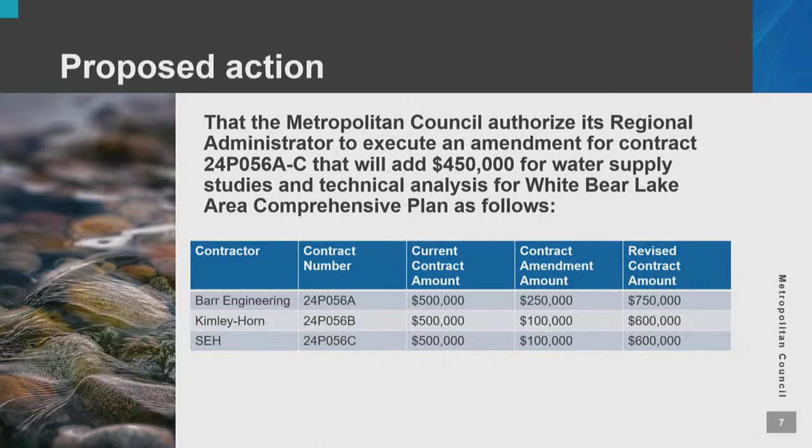Councilmember Jenkins asked, as a new person familiar with Project 1007, how does this connect with that? Chair Wolf, Project 1007 is a study being done by the Health Department, one of about 18 studies we're now looking at, and it feeds into the overall work of this group. We're looking at Project 1007 as a way to see if there's a water source we can reuse the treated water from the PFAS settlement.

Councilmember Lindstrom asked: are these going to be funding studies 19, 20, and 21, or more supplementing the first 18? These will be funding some new studies, but they're also needed to finish up phase 2, part 2 of some of the current studies. We have not bid out or sent out work orders for all the current studies, so this will help us fulfill the rest of those orders.

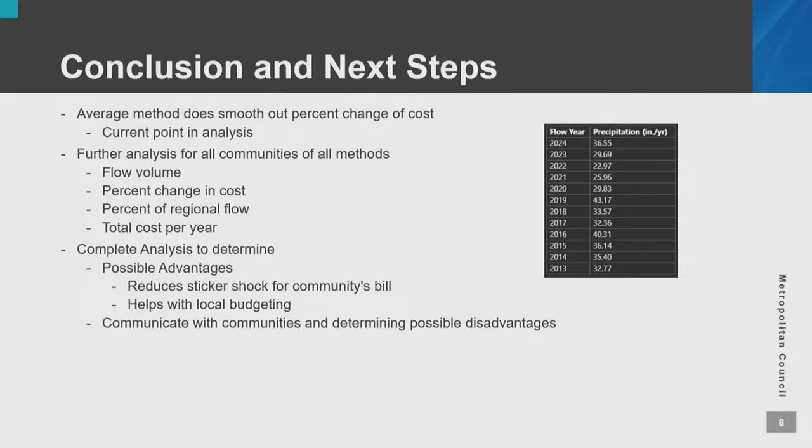So, conclusions and next steps: the average method does smooth out the percent change of cost and is a current point in analysis. Further analysis is needed for all communities and all methods - flow volume, percent change in cost, and total cost per year. This is needed so we can see possible advantages for each community, which could relate to reducing sticker shock for the community's bill, helping with local budget planning, and communicating with communities on determining possible disadvantages. Are there any questions?

Question: what sort of outreach was done with local communities to get their feedback on these two methods? Response: No local outreach has been completed as of this moment. We were just playing around with numbers to see how they would all look. In future steps, we're looking at maybe creating a task force and proceeding from there.

Okay, because the only reason I raised that is because this has been a question that obviously has come up recently, so I'm looking forward to seeing further steps. Thank you. Thank you.

Yep, and one of the other things that has come up with regards to this is what happens in a rapidly growing community. If you average it out, then they aren't actually paying their full freight because of the growth. Whereas, Champlin, where it's flat, they don't really have a change from year to year. But if you have a very rapidly growing community or you add a big user, you'd kind of get a little free sewer in your bill, a little while.

Councilmember Lindstrom: some places you have some unmetered flow too. And that's been some questions, especially when it's shared between two entities, one city and another, or one small town and another.

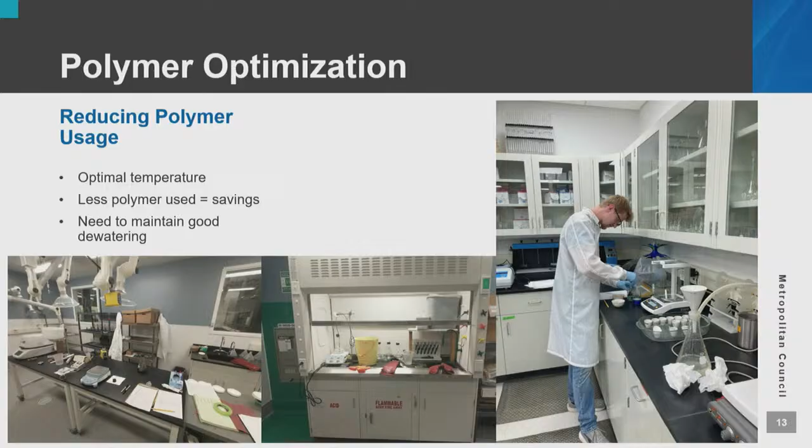So how do we reduce the polymer usage? This is a massive chemical cost for the Metro plant, and we want to reduce it as much as possible. Currently, with incineration, there is excess heat available that could be used. So we were looking at finding an optimal temperature where we can reduce our polymer usage, but still maintain good dewaterability in that sludge. This is a lot of information, so I'm gonna break it down slowly, one at a time.

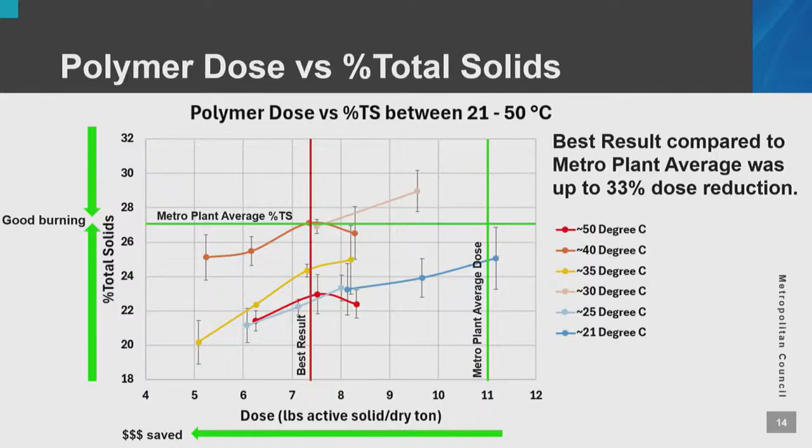That looks like great news. However, these trials were done across different days. We did a control alongside each and every single trial, and the controls varied a lot day to day. At the end of the day, what is coming into the plant we can't entirely control, so there's a lot of variation in the contents of the sludge. This brought up questions on how precise our laboratory method was in actually imitating the real process going on in the solids Metro building.

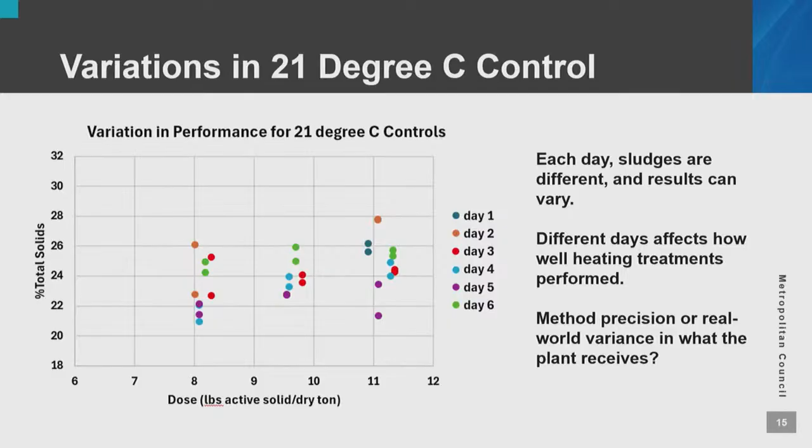The second thing I helped work on was an opportunity at the Seneca plant. There was cyanide inhibition happening on the nitrifiers, so nitrite was not converting to nitrate. We created batch tests, small jars of wastewater where we would try to recreate the issue and imitate the full-scale plant on a lab scale. To do that, we had to sample the wastewater to get it into those jars, and sample what was causing this inhibition. We found out it was cyanide, so we started treatment exploration for how to treat this stream of cyanide being generated within the plant.

This was my favorite part of the internship. It really allowed me to work closely with a team of engineers and collaborate with other sections of environmental services, including the lab at Metro, operations at Seneca, and even a little bit with industrial waste at the Metro plant. It was eye-opening to get that greater experience and see what the council does as a whole to help solve problems.

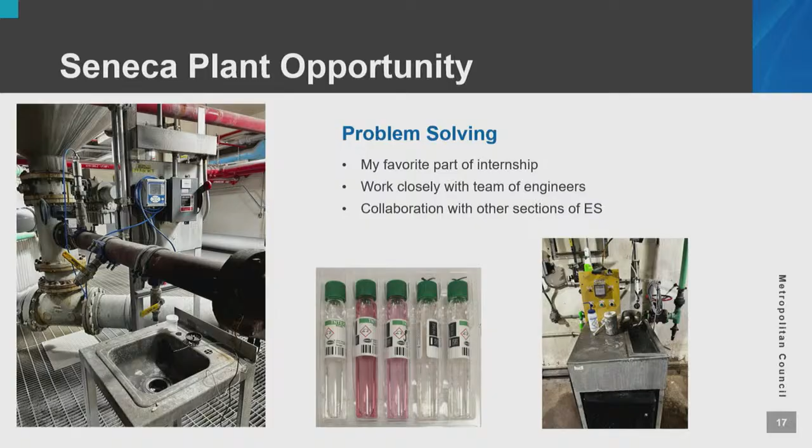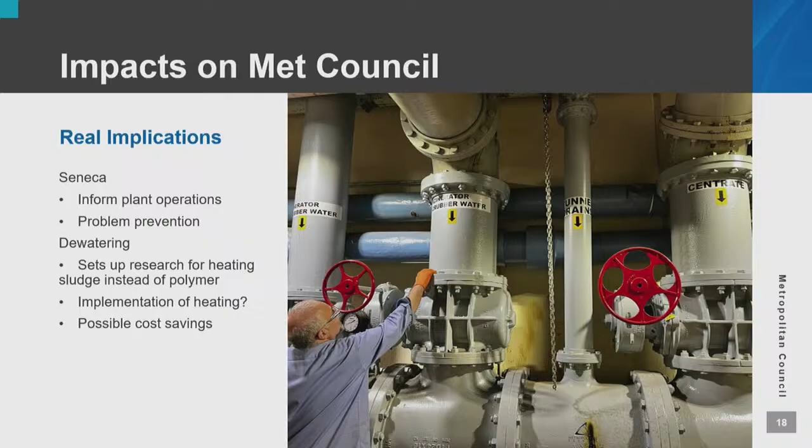Both of these have real implications on Met Council. With Seneca, I helped inform plant operations and assist future problem prevention. With dewatering, it sets up further research for possibly heating the sludge instead of the polymer. Is there an optimal temperature where we can use excess heat from incineration to see if sludge temperature makes a difference on the binding? Or even ask, how could we implement infrastructure for heating if we do get a 33% dose reduction, since that's a lot of dose reduction across that $3.4 million budget. That possible cost savings is the goal, to see if with further research we can set up infrastructure in the plant to reduce our polymer usage.

The impacts on me, I really enjoyed my time here. It allowed me to have teamwork and collaboration with a team of engineers and do some problem solving that was very applicable to real life. For me, it confirmed my interest in wastewater and continuing to serve communities no matter where I end up.

Are there any questions? Thank you.

Councilmember Carter: I was just wondering, what's the primary cause of the cyanide in the water? Because that's a pre-existing problem, right? Thank you, Ms. Chair and committee members, for the question. The primary cause of cyanide in the water here was incomplete combustion in a multiple hearth incinerator that would not get rid of all the organic compounds, and then it would generate cyanide. The cyanide would then be captured in our air pollution control train, and that is discharged back into the plant as a recycle stream. Does that answer your question? Yeah.

So how do you fix that? Thank you, Ms. Chair and committee members, for your question. That is something we are currently trying to figure out because we didn't have a long-term solution in place. We were able to help operations get back to normal of sorts, but we are still looking at long-term solutions for that treatment. Thank you.

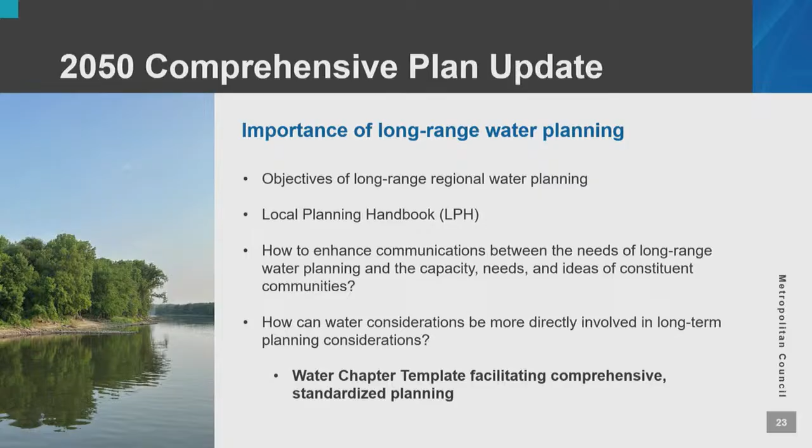A big question I came to ask, along with a team here in environmental services, was how we can enhance communications between the needs of these communities and the long-range water planning and capacity needs, and how water considerations can be more directly involved in long-term planning. We came to developing some materials, and I came to support the development of these, such as the water chapter template and the how-to guide for water supply planning.

One of my early experiences was being involved in the MAWSAC meeting, the Metropolitan Area Water Supply Advisory Committee. Hearing feedback from community planners across the metropolitan area was instrumental in developing perspectives on what planners are thinking about 25 years in the future, considering not only their water plans but all the other aspects water involves. Feedback included wanting sufficient resources, cross-collaboration, contingency planning, access to other communities' plans, and prioritizing requirements that might conflict with different watershed and state requirements.

By assisting with development of the how-to guide, I included examples from different communities from the 2040 Comprehensive Plan. We were able to provide example materials that communities will use for this next round of development, to establish commonalities between communities and recognize differences in approach, since every community in the metropolitan area has distinctive approaches and planning needs. I included a requirement and two example communities that might be relevant for future planning.

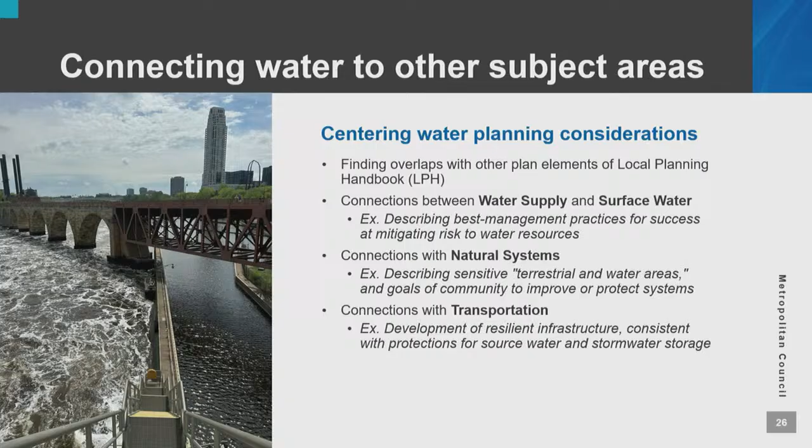Another part I helped develop was the water chapter template. Water is so important in so many ways, and for a community to develop their water supply plans, we wanted to make sure water was being considered front and center along with many other important considerations at play. By developing connections with different plan elements, such as natural systems and transportation, I included some examples here to better highlight water as an important consideration in the water chapter template.

Other similarities include parks and trails, the protection of surface waters, and housing. Housing is similarly universal and important as water, making sure these considerations are equitable, sustainable, and important for the long-term planning of member communities in the region. This includes development of housing needs concurrent with expected water demand, and analysis of affordable housing factored in alongside access to water resources.

In developing these plans, we didn't just want empirical numbers, but wanted a narrative explanation so that communities developing their comprehensive plan can follow along with how other communities with similar water planning needs or requirements were able to complete their own plans.

The outcomes for these long-range plans will synthesize all the resources and considerations communities are thinking of, to build a resilient, prosperous, and prepared regional community. By 2050, communities within the metropolitan area can look back and understand that these plans they developed were purposeful and impactful.

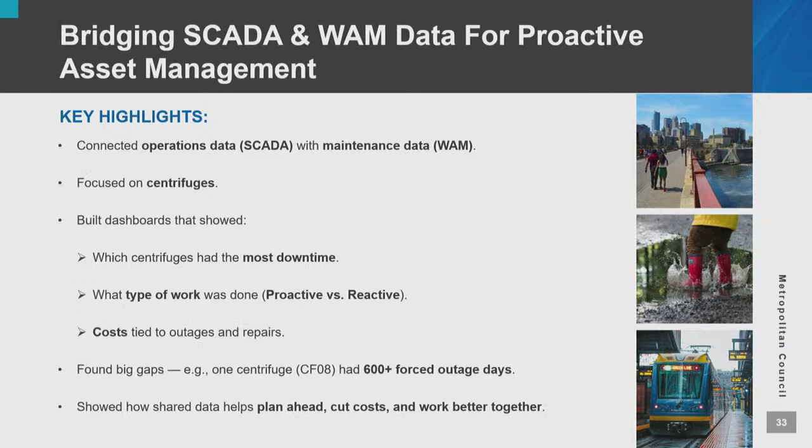And this kind of information seems super simple, but it's extremely helpful in helping us quickly identify where the major reliability issues may be hiding and which exact equipment might need closer attention from us.

What's the definition of forced? So there are two sorts of outages. It's either you schedule an outage, so you take this centrifuge down and see if any work is upcoming, or a forced outage, which is when it stops because there's a problem that has to be forced.

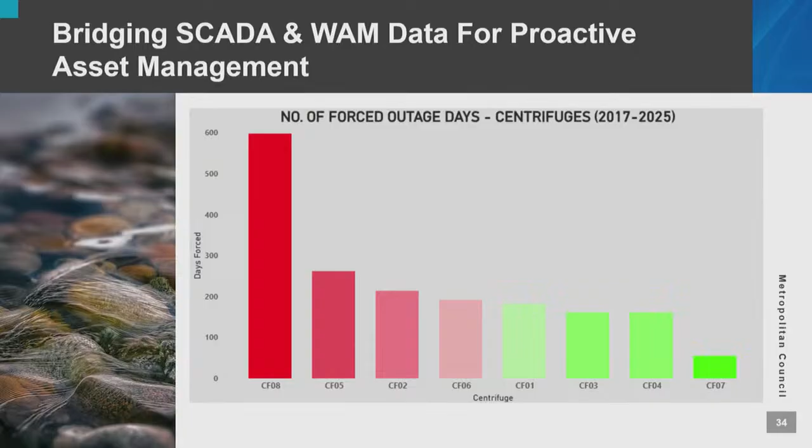And so from there, I basically created two drill-through pages, which in simple terms are detail pages. For example, if a person is on the main dashboard and is thinking to themselves, why did centrifuge 8 have so many forced outage days, can I get more detail on them? There's basically an option where you can go and see more details.

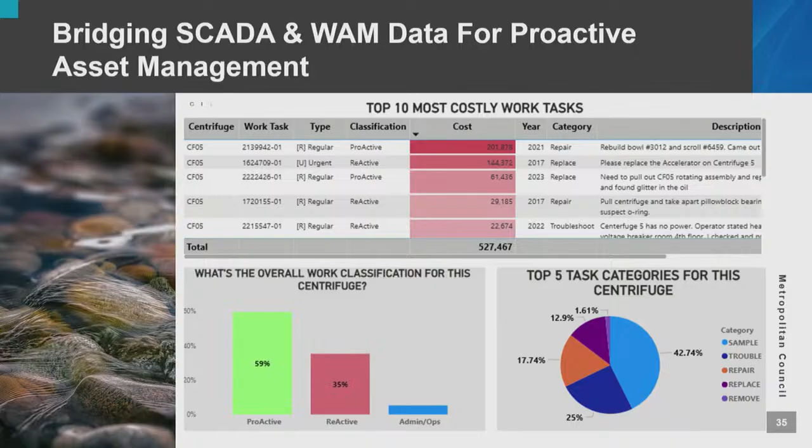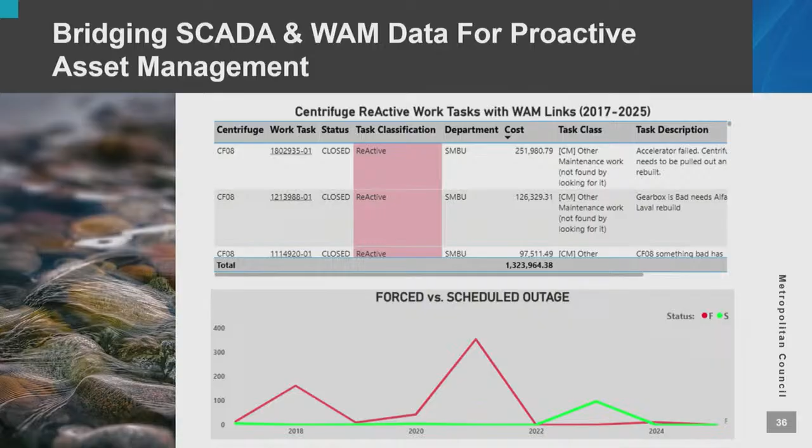And together with the visualization below that, it shows the trend of forced outages versus scheduled outages over time, again from 2017 to 2025. Here we can see that some years had spikes in forced outages, specifically for example 2021, which can possibly show us or highlight when equipment reliability issues were at their worst.

So why does this matter? Today, if we start combining SCADA and WAM data together, it will not only help us plan better, it will also help us budget better, and possibly help us identify reliability issues or equipment issues comparatively earlier. Another advantage would be it would help the asset management department work much more closely together with the operations department. But right now, different departments work in separate systems without a centralized data hub, and that makes it comparatively harder to see the full picture.

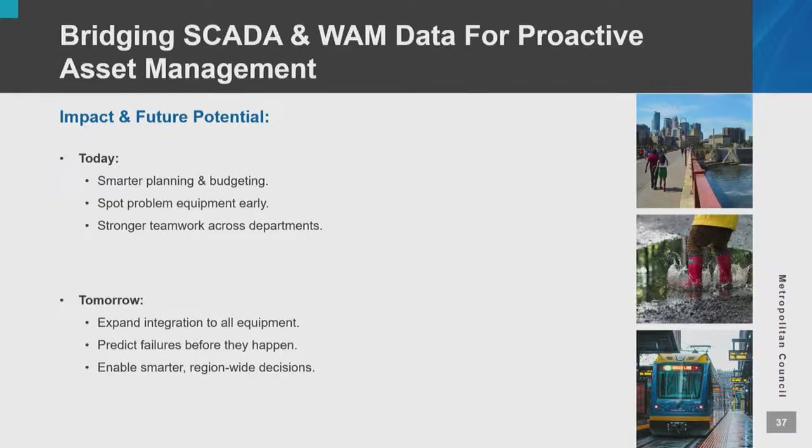And tomorrow, or the future, if we bring our data together in one place across systems, across equipment, across departments, we would be able to move more towards predictive maintenance. We would be able to forecast failures before they even happen and make smarter region-wide decisions for the Twin Cities based on shared data. This project was just a really high-level proof of concept showing how powerful integrated data can be, and how much it can help the council plan better.

Beyond the technical side, this internship was an amazing experience. It really helped me understand how wastewater treatment plants and facilities work. I generally had not much idea before I got to know about Metropolitan Council, especially the ES division. Just understanding the immense amount of planning and effort that goes into maintaining water quality in the Twin Cities region. On a lighter note, an interesting fact I found out is that not all flushable paper towels are actually flushable, so I've not been doing that anymore.

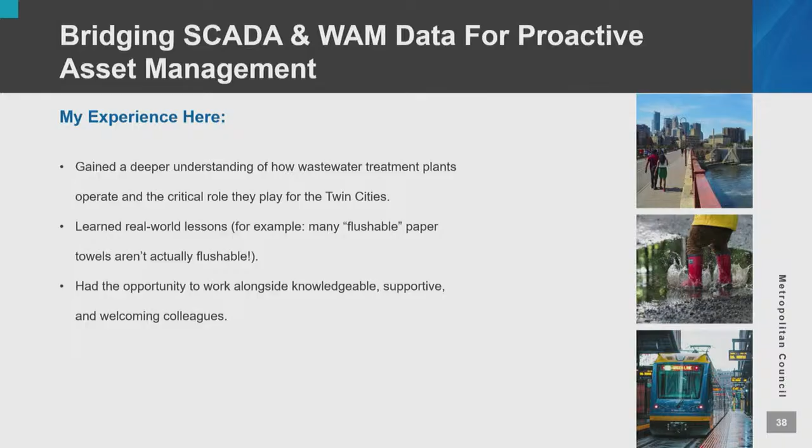More importantly, it was just an amazing experience working with a few of the most knowledgeable, kind, and supportive people in the ES department, and even other departments as well - my fellow Met Scholar interns and fellow ES interns. All of this combined made this experience a really meaningful one for me.

Before I end this, I think this quote really sums my project up well: that data is only as valuable as the decision that it drives. That was all that my project was about - not to just collect data, but actually use it to make important decisions, faster decisions, save money, improve reliability, and strengthen collaboration.

I'd love to ask if you guys have any questions.

Thank you. Councilmember Carter: Yeah, I just had a question. It said, based on your feedback, 25% of the reasons it was shut down was because of specific trouble, correct? What exactly was it - paper towels or was there another cause? I was just wondering what the primary cause was.

Thank you, Chair and committee members, for the question. I was mainly working with the data that was in the WAM system and the data models in that, so I would not have a specific idea why they were categorized as repair or trouble or other different categories - those were just the categories that the database administrators have made. I personally wouldn't have that much information on the exact reasons.

Do you think that would help their process if they had more specific data so that they could identify what were the key problems that were reoccurring?

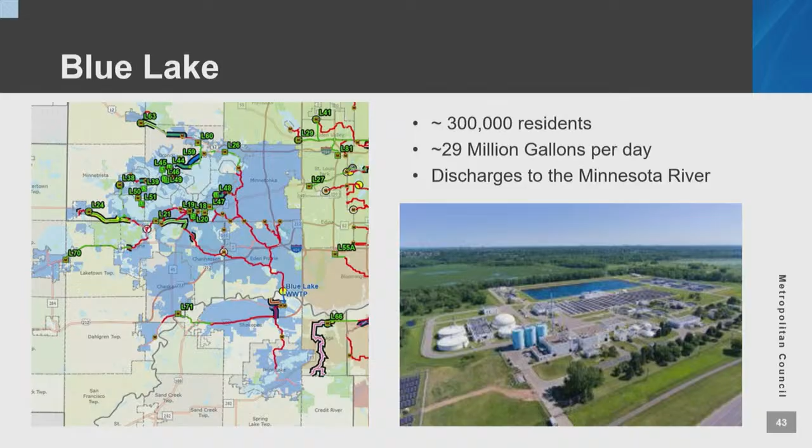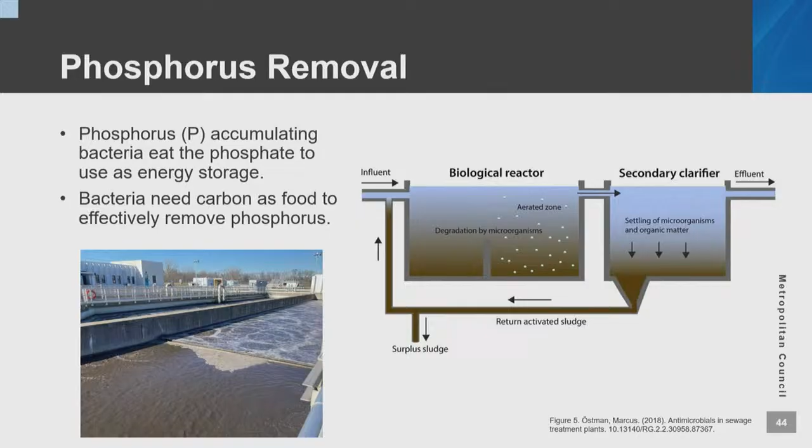The reason phosphorus removal is so important is because it can have a negative effect on our river ecosystems. The way that Blue Lake removes phosphorus from the system is with phosphorus accumulating bacteria. The bacteria eat the phosphate to use as energy storage. Most waste in the facility is removed by gravity settling. The solids settle to the bottom, but phosphorus doesn't tend to sink, while the bacteria do sink. So when the bacteria eat the phosphorus, they sink together so the water can move on without the phosphorus and without the bacteria. But to do this process most effectively, the bacteria need carbon as food.

There we go. It looks like there is a slide out of place. My apologies, I'll go back to that in a second.

The problem at Blue Lake is that there's a new permit limit set to be implemented in 2037. Currently our permit limit is around 110 kilograms per day of total phosphorus concentration, but the new permit limit is less than half of that. If you take a look at the graph on the right, Blue Lake's average annual phosphorus concentration is in blue, and the new permit limit is in orange. As you can see, Blue Lake has often been above this new permit limit, so that's why it's crucial for Blue Lake to consider how to remove the phosphorus more effectively.

Another problem is that Blue Lake often experiences phosphorus spikes. This is because an industry that contributes a lot of carbon in their wastewater to the treatment plant has periodic shutdowns. So whenever they shut down, the wastewater has less carbon, and with less carbon for the bacteria to eat, it removes less phosphorus, which results in a phosphorus spike. We also call these facility or plant upsets.

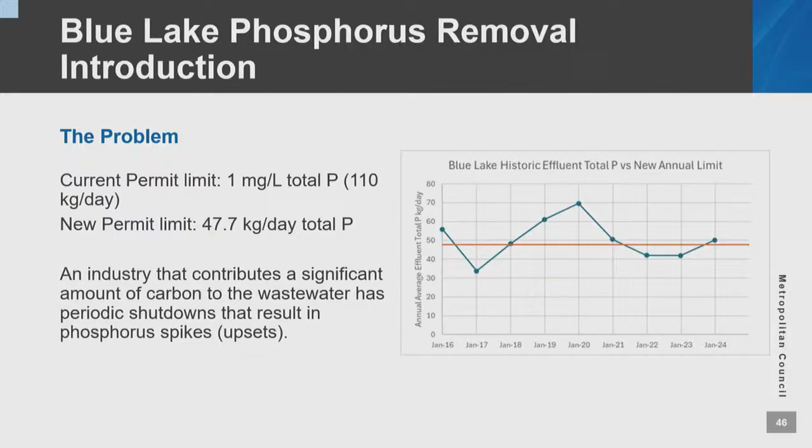So my project focus is, first, predicting phosphorus spikes with the aerobic phosphorus uptake test, and second, removing phosphorus more effectively with ferric chemical treatment and carbon supplementation. Ferric chemical treatment removes phosphorus similar to how bacteria remove phosphorus; the ferric forms a solid with the phosphorus and they sink together. Adding carrier water, which is cleaned wastewater, improves the mixing of ferric with the wastewater. But if you add too much carrier water, you might have a situation where the ferric forms a solid or precipitate with the carrier water rather than with the phosphorus. So Blue Lake was looking at whether the precipitation of ferric with carrier water has an impact on the phosphorus removal with ferric.

Taking a look first at the phosphorus aerobic uptake test: this is a test where I took a sample of wastewater with bacteria in it, let it sit for 30 minutes, and measured how much phosphorus was removed over that 30 minutes - how much phosphorus did the bacteria eat in that time. In the data in orange on the graph, this represents the uptake rate during tests from the past year, as an average. The first one shows what the average uptake rate is during normal conditions at the plant, around 10. But whenever that industry contributing carbon has a shutdown and we have a phosphorus spike, the uptake rate in the past has been less than 5.

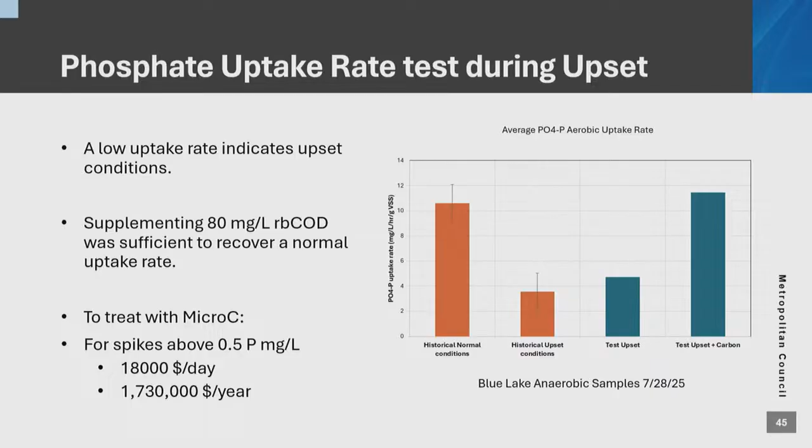So if the plant doesn't want to consider purchasing carbon, they can also consider generating their own carbon through fermentation. This is something I looked into a little bit this summer, but there's still a lot of experiments and testing we need to do to fully look into it. In the meantime, the plant is looking at controlling phosphorus spikes with ferric chemical treatment.

Specifically with diluting ferric with carrier water, I found that precipitation occurs at a ratio of 1,250 milliliters of carrier water for every 1 milliliter of ferric. In plant terms, this is about 1,250 gallons per minute of carrier water for every 1 gallon per minute of ferric. Blue Lake currently does not have the capacity to provide that much carrier water for the amount of ferric, which is good news for them because they're not likely to actually get precipitation in their system.

In the two pictures on the slide, on the right you have ferric with carrier water precipitated, and on the left ferric that's not precipitated and is dissolved in the carrier water. So as long as Blue Lake does not get up to that 1,250 ratio of carrier water to ferric, they will not form a precipitate. But just to see if precipitation does affect phosphorus removal, I took a sample of precipitated ferric and not precipitated ferric and added each to a sample of wastewater and measured how much phosphorus was removed.

During this test, I had 3 trials. On the right you see the phosphorus removed amount of the precipitated ferric, and on the left is the phosphorus removed amount of the not precipitated ferric. Overall, I saw 20 to 30% less phosphorus removed with precipitated ferric than with not precipitated ferric. So in summary, precipitated ferric is less effective at removing phosphorus because it's already formed a solid with the carrier water, so it's not as likely to form a solid with the phosphorus as well, which makes sense.

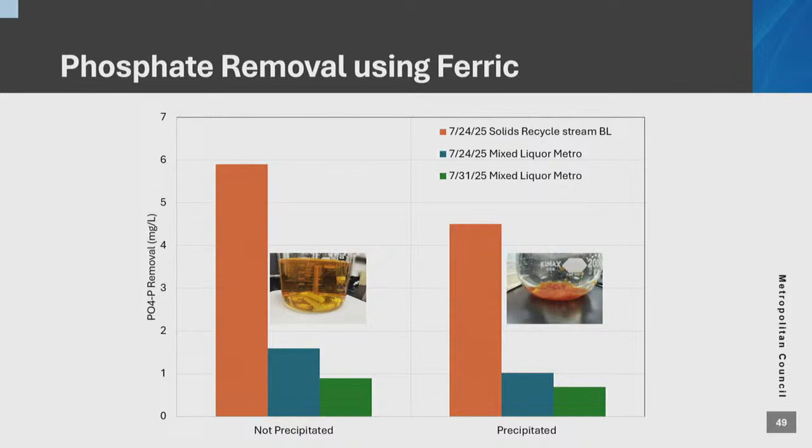So I've really enjoyed my opportunity this summer. I love planning, preparing, and conducting experiments. I love learning hands-on, so I got to learn so much information on a variety of wastewater topics. Talking to my coworkers and the Met Council employees, I explored what my future career would look like. And working with my coworkers in R&D has been fun, building relationships and learning to work well together. So thank you so much for this opportunity.

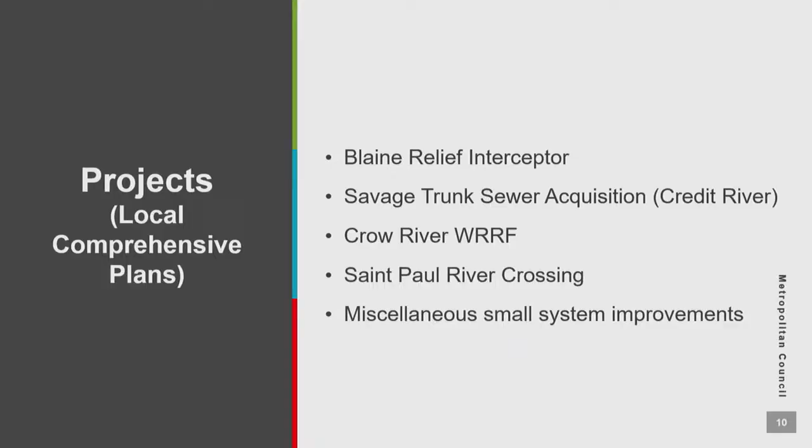And with that, I'll turn it over to Renee.

Quick question on that—the Blaine project. Is it going to have an impact on Blaine, or is it more an impact on Lino Lakes, or both? The reason I'm asking is I'm presenting to the Blaine City Council in a week, so I'm wondering if it'll come up, or if I should bring it up.

Well, they are aware of the project. It's actually a little bit of both. The primary purpose of that project is a new pipe to redirect existing service that Lino Lakes now gets through the interceptor that serves Blaine, and also to provide additional capacity to accommodate growth in Lino Lakes. Through that redirection of existing service from Lino Lakes, it frees up additional capacity for additional growth opportunities in Blaine.

Fantastic—if you don't mind putting that in bulleted form and sending it my way, that would be much appreciated, and maybe a little map too. Yeah, maps are good. Can certainly do that. Thank you.

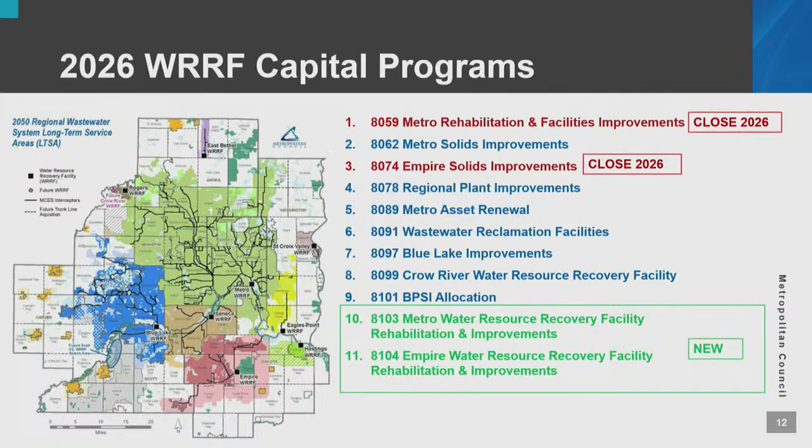Program 8062, Metro Solids Improvements, includes the addition of a 4th incinerator and rehabilitation and improvements of solids auxiliary systems. The 2026 through 2031 capital program includes an additional $32 million to fund updated scope and cost for rehabilitation and improvement of solids auxiliary systems.

This is project 806211. This project constructs near-term reliability improvements ahead of a more comprehensive renewal project. An additional $10 million is requested to fund cost for other contracted services such as special inspections and construction administration staff time to support the 4th incinerator project.

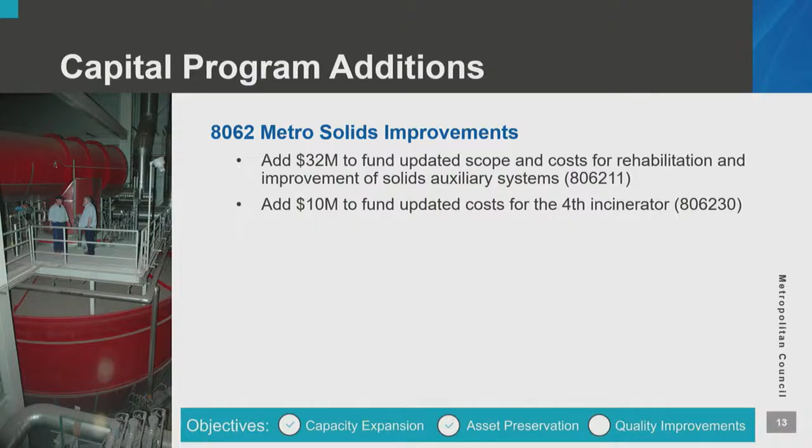That's 806230. The 4th incinerator did not qualify for PFA funding, so Program 8062 is bond funded. Renewal of the existing 3 incinerators, which was previously included in Program 8062, has been moved to the new Metro program so that it can be resubmitted to the PFA for funding approval.

Program 8078, Regional Plant Improvements, includes relatively small projects at each of the individual regional plants to address near-term needs. The 2026 through 2031 capital program includes an additional $21 million to fund updated scope and cost for St. Croix Valley Water Resource Recovery Facility Upgrades Project 807811, and an additional $14 million for anticipated future projects. Those would be the new project list.

Project 807811 includes new bar screens and compactors, rehabilitation of the gravity thickener, replacement of primary sludge pumps, aeration, HVAC and electrical improvements, a new UV system, road reconstruction, and a new alum storage and feed system, all for St. Croix Valley.

Program 8089 continues asset renewal projects at the Metropolitan Water Resource Recovery Facility following the 8059 program, which is being closed in 2026. The 2026 through 2031 capital program includes an additional $24 million to fund updated scope and cost for current capital projects, including renewal of the effluent pumping station, odor control renewal and improvements, and primary sludge pump renewal at Metro.

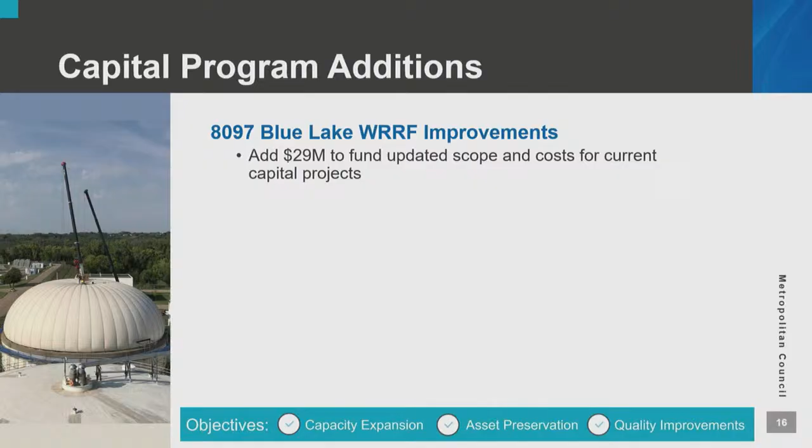Program 8099 provides for design and construction of the new Crow River Water Resource Recovery Facility in Rogers, Minnesota. The new facility, which will have an initial capacity of 3 million gallons per day, will relocate service provided by the existing 1.3 million gallon per day Rogers Wastewater Treatment Facility, which the council has operated since 2019.

Crow River will serve long-term growth in the communities of Rogers, Dayton, and Corcoran, as well as free up capacity in the Elm Creek sanitary sewer that conveys flow to the Metropolitan Water Resource Recovery Facility. The 2026 through 2031 capital program includes an additional $2.1 million to fund updated scope and cost for consultant services and preliminary work such as site preparation and geotechnical exploration.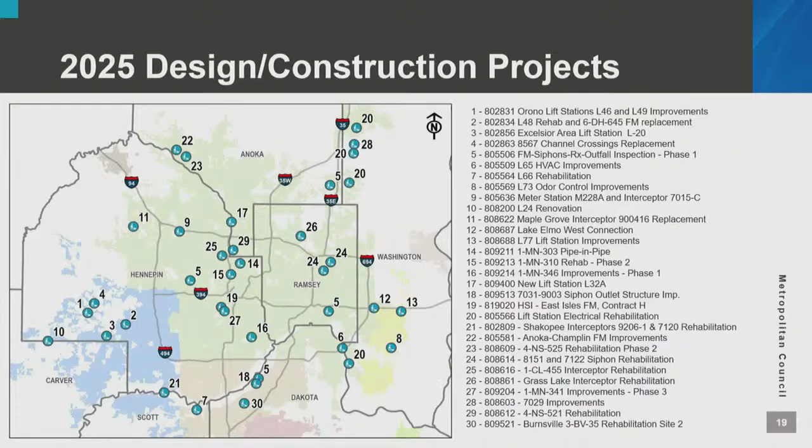Our likelihood of failure is a determination that comes directly from our condition assessment programs, ranging from excellent to failing. For example, in our presentations going forward, as part of our pipe assessment, if somebody refers to something as poor condition, that means it has a predicted failure within 5 to 10 years, as opposed to certain, which has a structurally failed pipe that may or may not have already collapsed, has severe defects, and requires immediate action. So you'll hear jargon like condition 5 pipe or condition 4 pipe. Condition 5 pipe is one that needs to be addressed right away.

The likelihood, or condition data, is gathered throughout the year in any one of our 5 condition assessment programs that we currently have in place. The work is done by our operations staff, maintenance staff, and engineering staff. We typically follow industry standards for assigning likelihood ratings. Once a year, the engineering and operations leads, managers, and maintenance staff review the consequence ratings and consider level of service factors. The overall risk is computed by taking the product of the consequence and likelihood ratings. For this year, as with the previous year, areas identified having a risk of 16 or higher are entered into the capital improvement program.

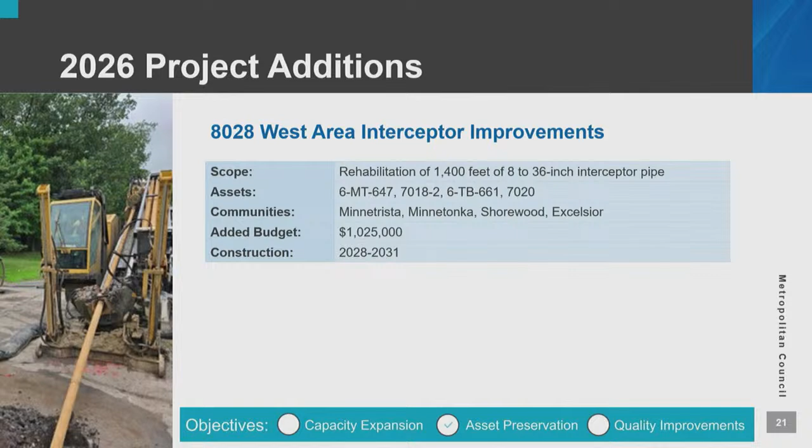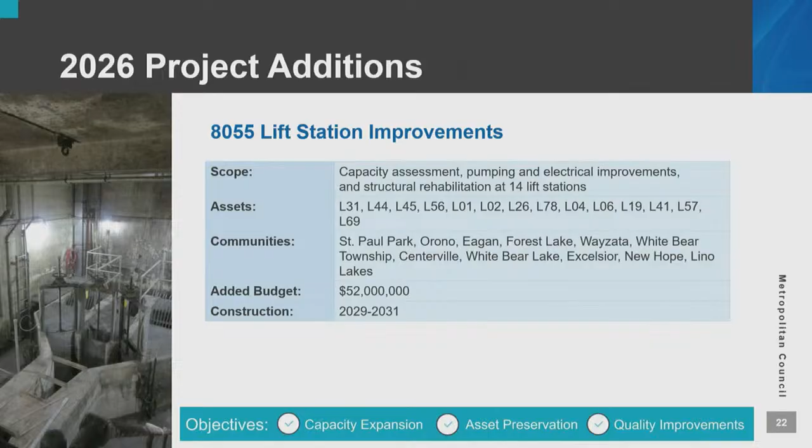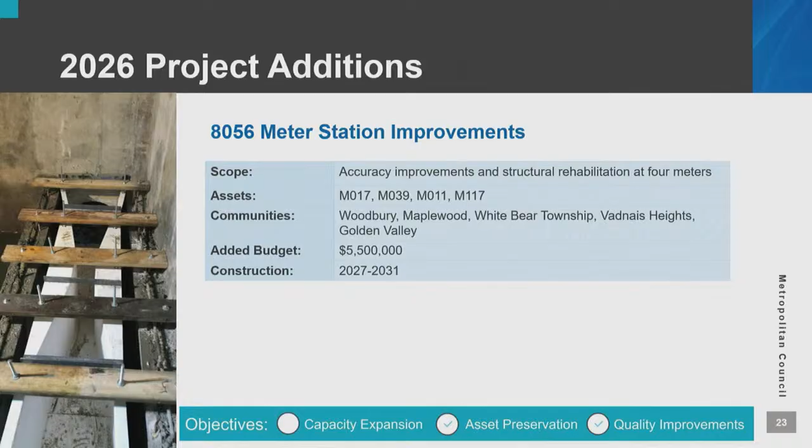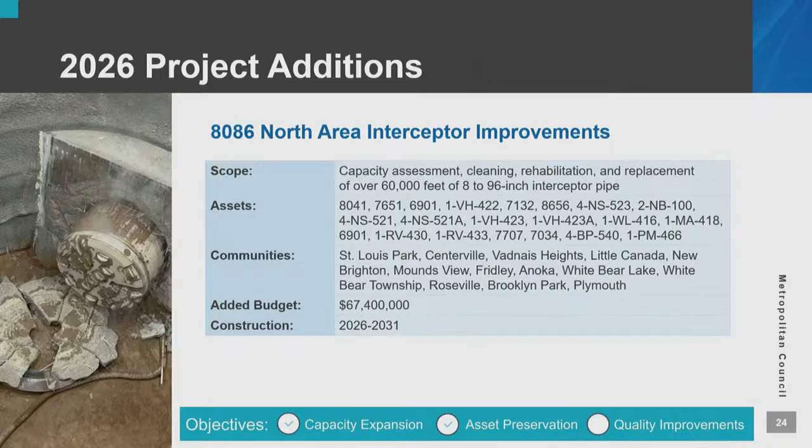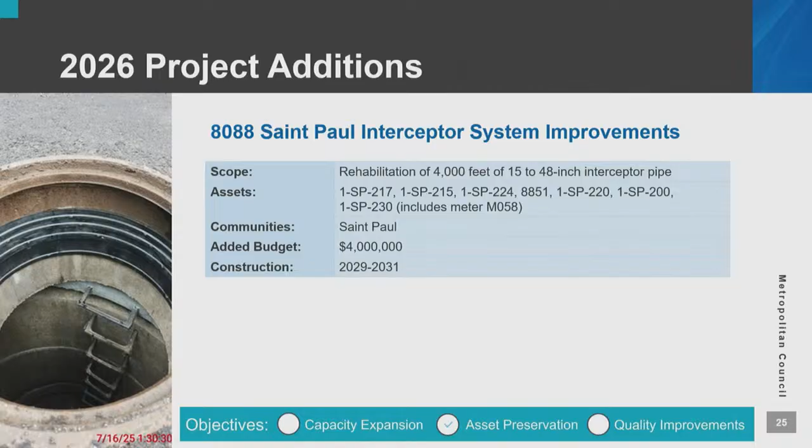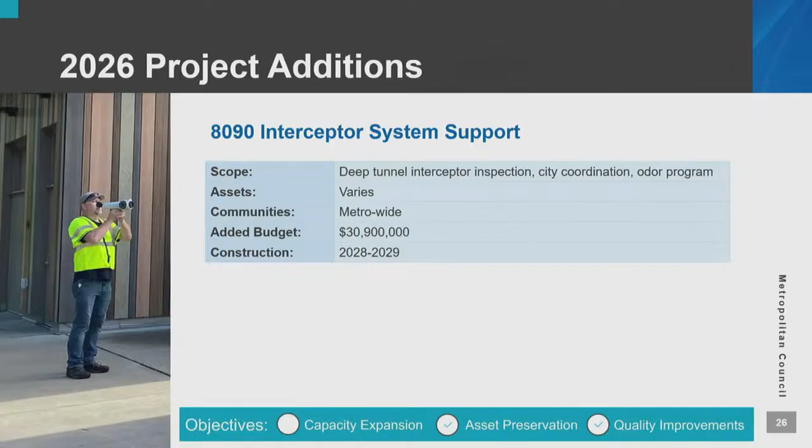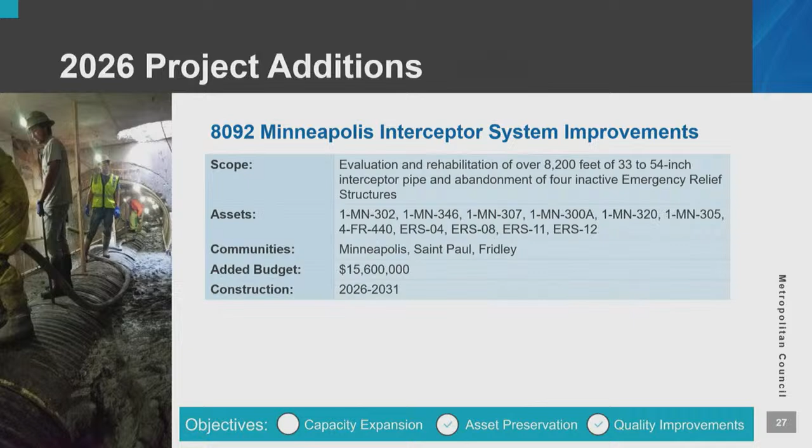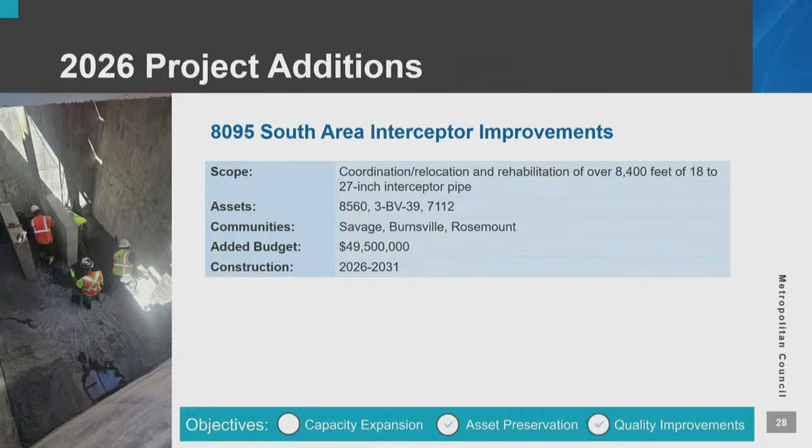And with this, I get to pass the clicker back to Kyle. Thank you, Adam. Thank you.

Just to wrap up here, this is the overall schedule for the council to get its unified capital program through the approval process. Today, the 26th of August, is the informational meeting, the information presentation to the Environment Committee. On September 3rd, each division is supposed to submit its 6-year capital CIP to RA Finance. Then on October 8th, each division will make its presentation to the council, I believe through the Management Committee. Then the council will release its Unified Capital Program for public comment and review.

On the 22nd of October, there will be an adoption of that public comment on the budgets. Then at the last council meeting of the year, usually the first or second Wednesday, typically in December - they usually cancel the one near the holidays - the council will adopt its unified 2026 program budget and levies.

What is ISLT? Integrated Servant Leadership Team. You're sitting next to one of the members. There's another one sitting behind me. It's the upper management of environmental services. Thank you. Yeah.